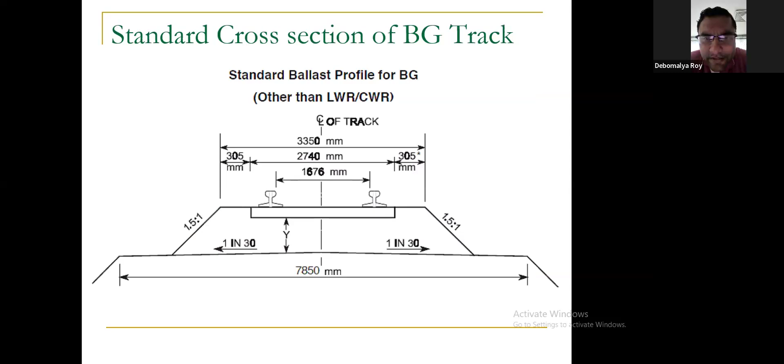In this slide, what is given is the dimension of Y, that is ballast cushion. Ballast cushion in general, we adopt 300 mm to 350 mm, or in some cases 400 mm. 250 mm is not adopted nowadays; those were adopted in earlier times. But in some yard portions or old stations where modification has not yet been done, there may be 250 mm ballast cushion available. Generally, we adopt 300 mm and 350 mm ballast cushion, that is Y is equal to 250 mm, 300 mm, or 350 mm.

In some important sections, such as the DFCC, that is dedicated freight corridor, where heavy traffic movements are considered, there are some stretches where 400 mm ballast cushion has been considered. Otherwise, 300 to 350 mm ballast cushion is generally found.

According to this ballast cushion, the approximate cross-section area of ballast is determined in square meters. These are actually required for reconciliation purpose and billing purpose. Here also, the main thing is for single track, the top of embankment width will be 7850 mm. This is standard.

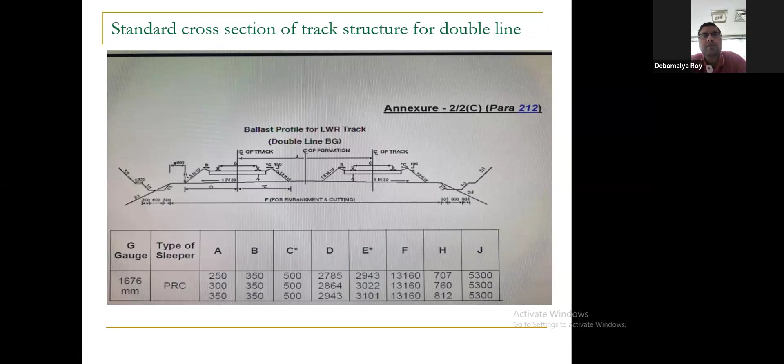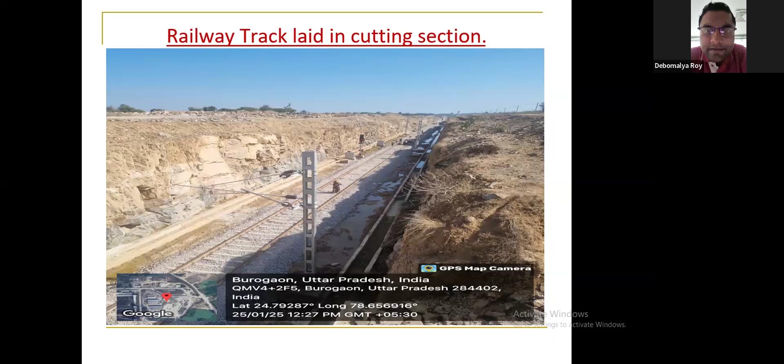Here I have shown the vertical cut portion at one side, and at the opposite side, you can see 1:1, that is 45-degree cutting. Because in the left side we encountered hard rock, we kept vertical cutting. We didn't increase our construction cost, because cutting, rather blasting, requires huge expenditure. So you can always avoid it by providing vertical cut wherever you encounter hard rock.

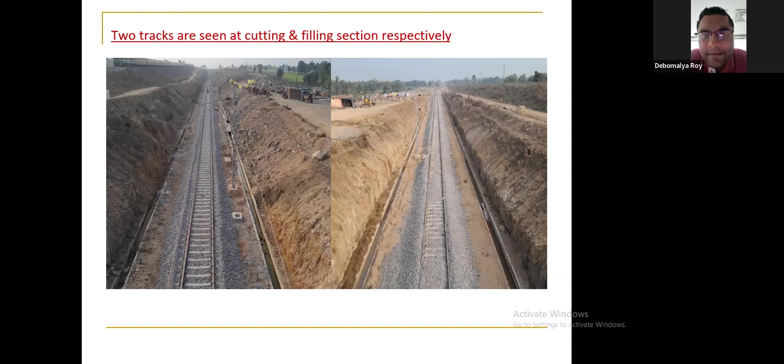Checking and adjustments are still pending. Also, you can see the fasteners of rail with sleeper. In the sleeper you have 4 inserts where these elastic rail clips insert, and one end of that elastic rail clip lies on the flange of the rail. By that, the rails are fixed. So at every chainage or kilometerage on the sleeper, 4 such fasteners are maintained, 4 ERCs are provided. This is the mechanism of rail connection with sleeper.

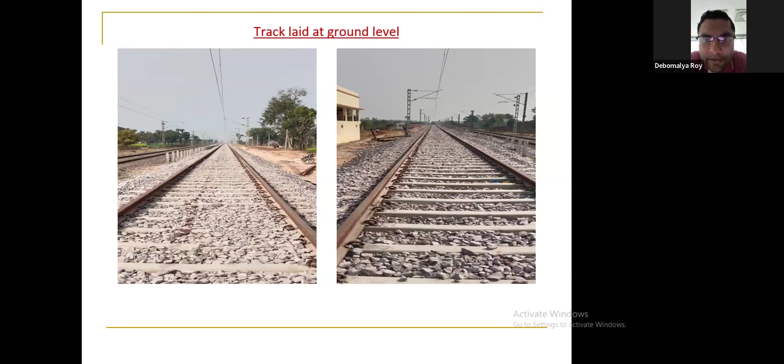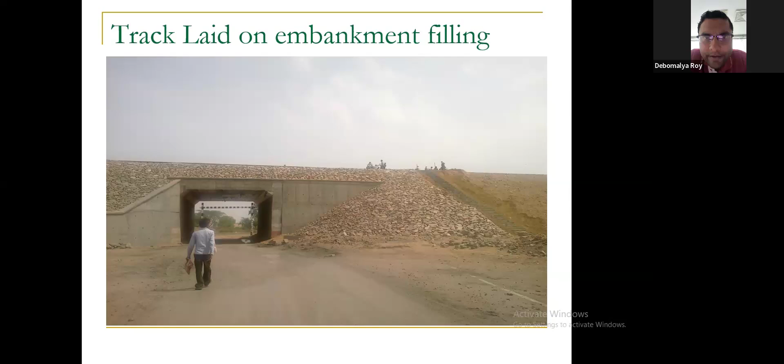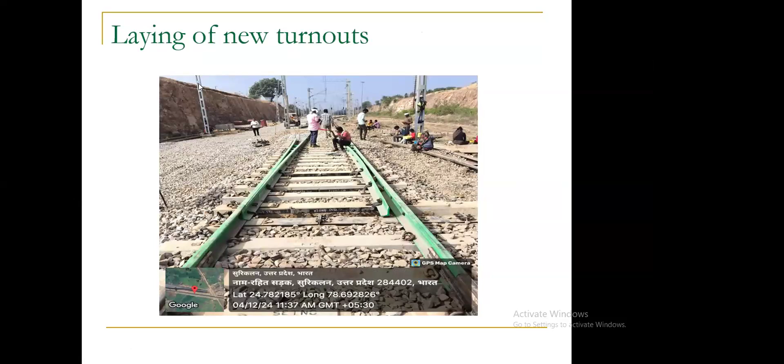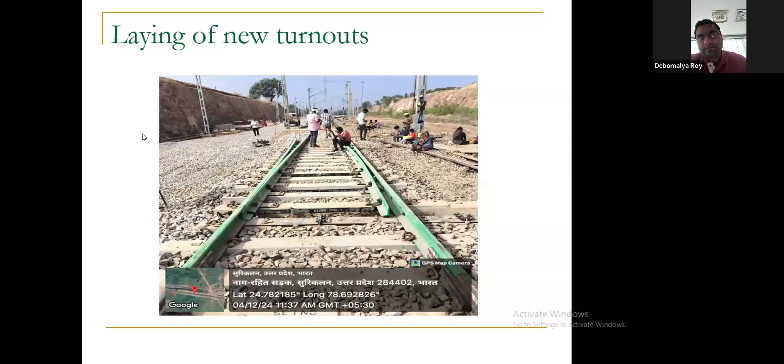For any new railway project, you have two phases of work. One is entirely new work, which is independent and can be executed independently. The other is connecting that new track with an existing station or yard, because otherwise no train will come. You cannot create an independent railway siding without jointing it with an existing railway station or yard.

Whenever you connect with an existing station or Indian Railway yard, you have to go through NI working. NI working means non-interlocking time, where all other trains are operated manually, not through signals or point machines. In those phases, you have to complete the connectivity work.

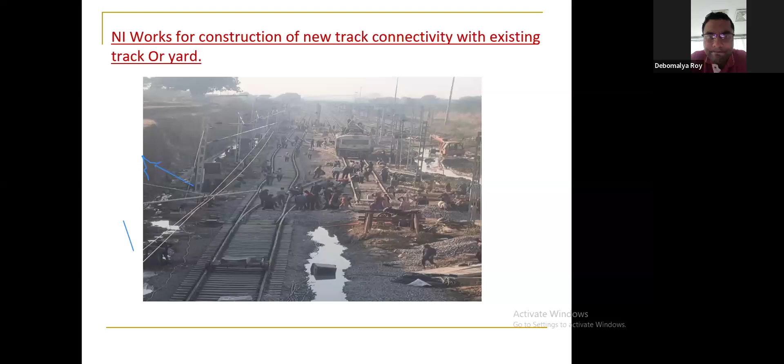Here I have only shown the NI working where a huge number of manpower are engaged.

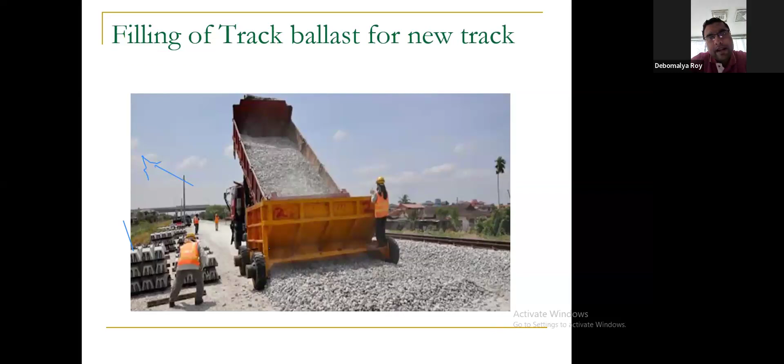Filling of track ballast. Track ballast is a very important part of track structure as far as civil and railway engineering is concerned, because this ballast transmits the load of the train. The load is transmitted to the sleeper first through the rail, then the sleeper distributes and transmits the load further to the ballast section, and then the ballast dissipates it further to the prepared subgrade. So the ballast section's sufficiency, adequacy, and quality are very important.

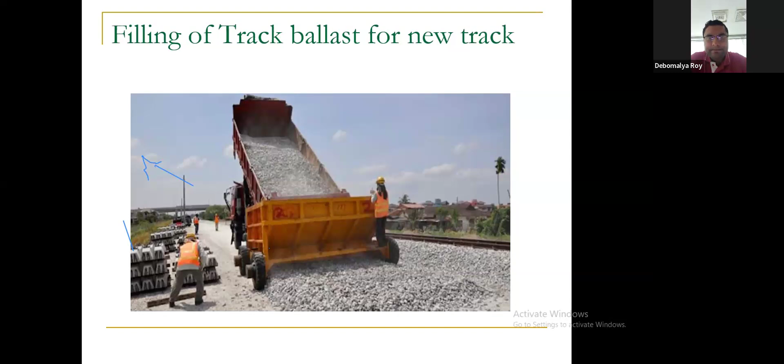Narrow gauge and meter gauge are obsolete, so we only have broad gauge sections. Aggregate abrasion value maximum allowed is 30%, and aggregate impact value maximum is 20%.

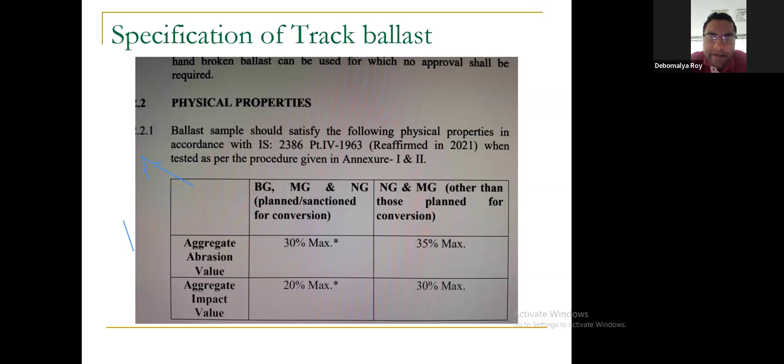Water absorption is generally 1% and maximum allowable up to 2.5%. Water absorption also plays an important role, but for ballast checking and quality, aggregate impact value and gradation are the main things. Gradation is very important; ballast size is the main factor.

Ballast size is between 65 mm and 20 mm. Below 20 mm, only 2% is allowed. If the percentage of ballast finer than 20 mm goes beyond 2%, there will be a rate cut on the agreed rate, that is the rate agreed in the purchase order. There will definitely be a rate cut if material finer than 20 mm is found more than 2%.

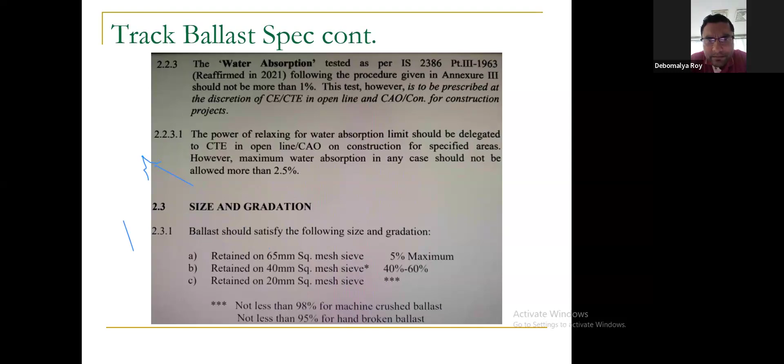First, we have to procure 100 cubic meters of ballast and stack it properly in a trapezoidal section. We can all see those stacked ballast whenever we pass by trains.

First, we construct a trapezoidal section using 100 cubic meters of track ballast. Then from that ballast, we carry out all the tests: aggregate impact value, Los Angeles abrasion, moisture content, and sieve analysis. If the tests are okay, meaning the ballast is found suitable for use, further ballast will be procured.

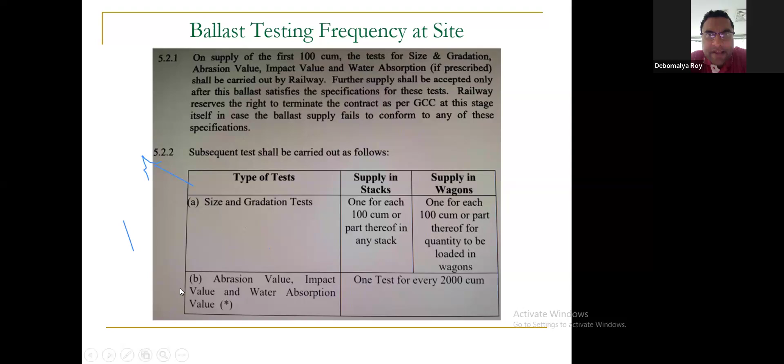Initially, you have to stack the first 100 cubic meters, then carry out tests, and then further tests: gradation per 100 cubic meters, and aggregate abrasion value and Los Angeles aggregate impact value per 2000 cubic meters. These are the standard ballast quality checking policies that everybody has to adopt.

Okay, a case study, that is overview of LPGCL railway yard and track parameters. Here I have taken our yard, but through these track parameters, I will also explain the general deviations and general features. So this is not only applicable for our LPGCL yard, but these are also applicable for Indian Railway tracks in different manner. Parameters will vary. Okay, I will explain.

Okay, that is a different thing. So there will be a specified track kilometer. So India is having some particular overall track length. Broad gauge track, we all know, meter gauge and narrow gauge are obsolete nowadays. So the gauge is 1676 mm, that is in between two gauge faces. That means the inner faces, the clear distance of inner faces of rail is 1676 mm.

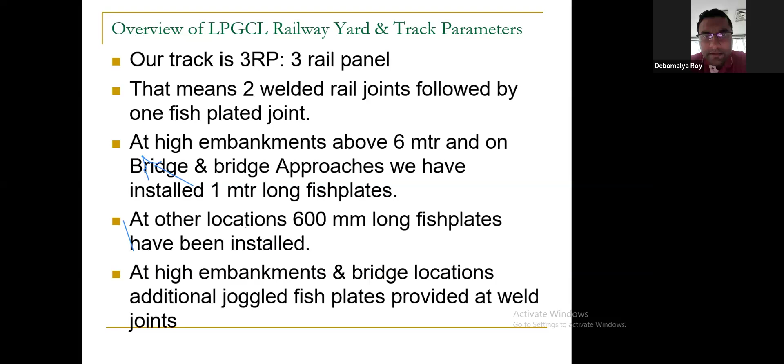And as I mentioned, at high embankment, bridge locations and bridge approaches, you have to secure your weld joints additionally with joggled fish plates. Those things I will show in my next slides, where you can see what a joggle fish plate is and everything.

This is permissible speed. In every section you will have permissible speeds. For Indian Railway, what is the permissible speed? Many people will say 240, 180, 200 - no, those are not permissible speeds, those are speeds of the locomotive. In certain cases a 180 kmph trial has been executed, but up to today, the maximum allowable speed in Indian Railway is 160 kmph, and that too in a very small stretch from Agra Cantonment to New Delhi.

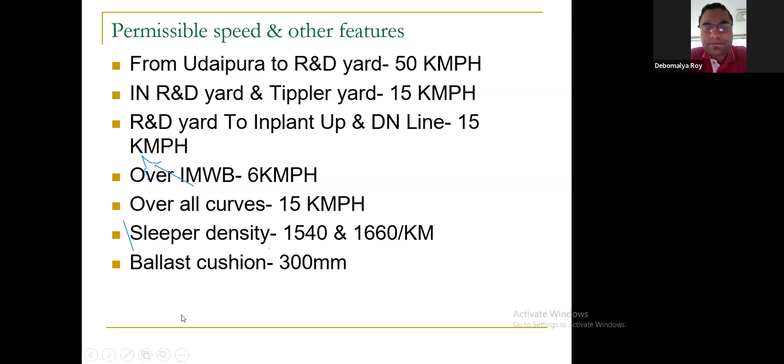Emergency track repair. This is very important because whenever some failure in track, signaling, or OHE occurs, it becomes emergent, since trains are continuously running 24 hours a day. So whenever there is a major failure, the train will not be allowed to move and will stop. Once the train is stopped, it becomes an emergency. So any major failure in track is an emergency failure which needs to be attended to at the earliest.

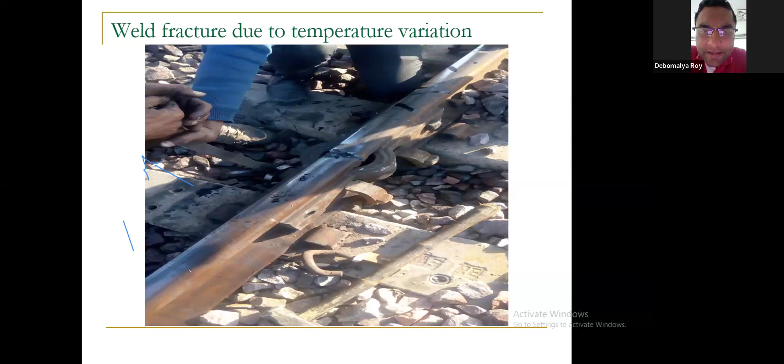So if one nut bolt is fractured or sheared, trains are allowed to move at their original speed; sectional speed is not reduced. But whenever it is seen, it must be restored at the earliest - we have to replace it with a new nut bolt.

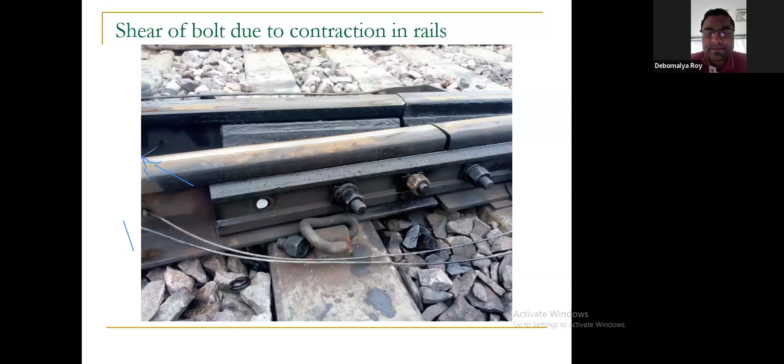Okay, next slide. Maintenance of track and track structures. Next slide.

This is IRPWM. In the start, I already said that whatever work we do in railway, whether construction or maintenance, is done as per approved RDSO documents. This is also another RDSO approved document - the Permanent Way Manual. Any type of maintenance activity has to be carried out based on these literatures. This is a very useful document for all railway maintenance engineers, who must follow these documents while carrying out any maintenance activity.

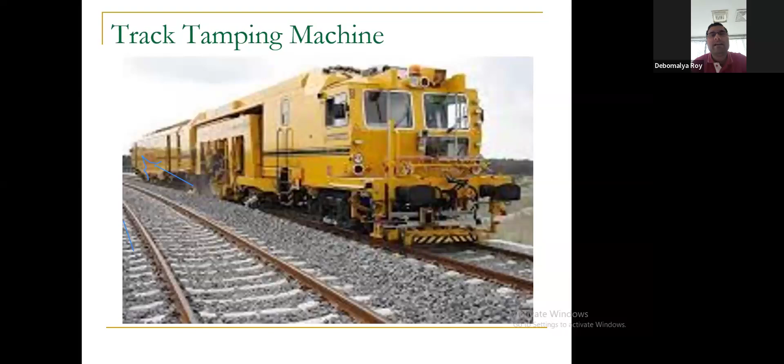Indian Railway has this sort of machine, but for private sidings, track maintenance is generally carried out manually. I will explain that in later slides. Okay, next slide.

Responsibility of engineering officials. These are a bit theoretical part. I'm just reading these things, nothing to explain in detail.

Devote careful and continuous attention towards the efficient upkeep of track to achieve good and smooth running quality. Running quality should be reviewed by riding on locomotive or rear vehicle of fast trains.

This is the mechanism followed by Indian Railway. In the last coach, a moving track recording system is installed, and senior officials can check the track. Automatic data on gauge, cross level, longitudinal level, any gauge difference or level difference will be automatically recorded in that coach. So these are the techniques used to gather site records and to assess where exactly we have to execute track maintenance activity.

Condition of track is best judged by the track recording car, in rear wheel track recorder. Oscillograph, these are installed inside the car. On-foot inspection and trolley inspection are also carried out. Trolley inspection is very crucial also. We maintain record of inspection and ensure compliance of inspection.

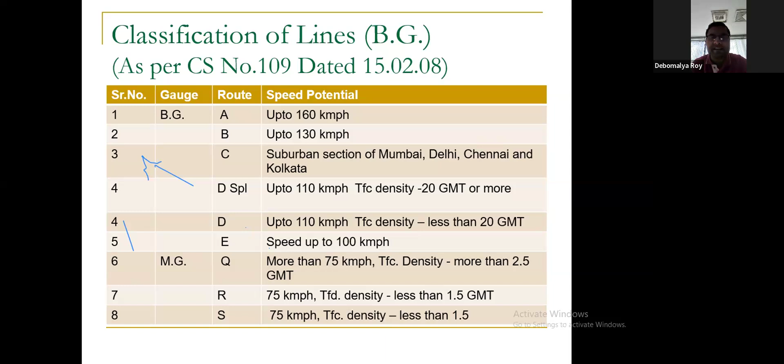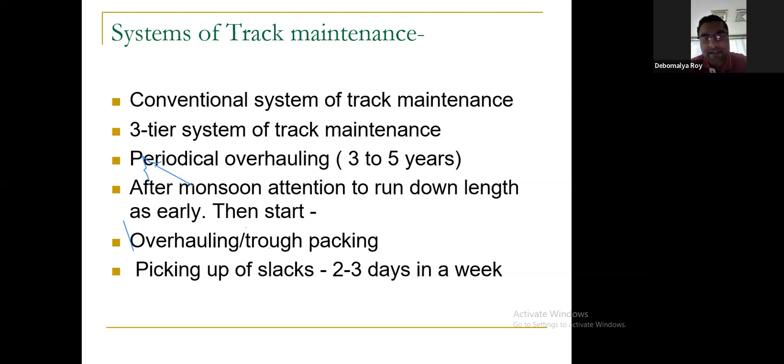Okay, next slide. I think I am having less time.

On track machines -- excuse me, Debomalya, sorry to interrupt you. You have enough time, you can continue please. No issue, if you need 15 or 20 minutes more, okay. If I need, I will carry out for 10 to 15 minutes more. Yes, yes, definitely, okay. Thank you.

Deep screening is replacement of track ballast, complete replacement of track ballast with new one, and at the same time that replaced ballast will be kept at a nearby location, made free from dust and stone dust which are having lesser than 20 mm size. Those parts will be eliminated and the rest of the ballast will be used again. So this is called screening, periodic screening, deep screening of ballast.

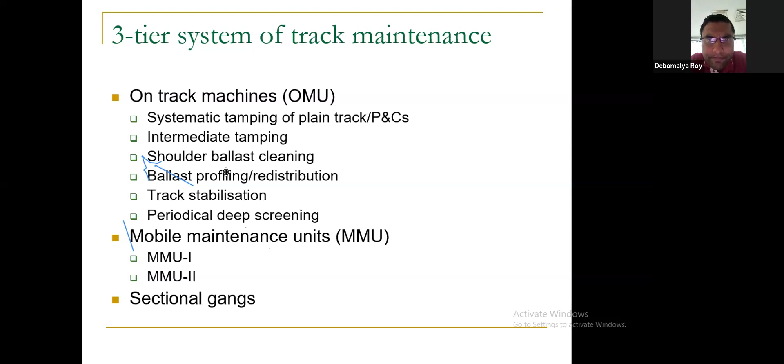Rail cum road vehicle. These are some techniques adopted by Indian Railway. Indian Railway has a huge and different process of track maintenance and its evaluation, where I have to actually use the gangs to evaluate the exact requirement. These are the methods Indian Railway monitors.

Creep and gap adjustment, de-stressing of LWR, CWR, these are also required periodically. De-stressing means in case of LWR section or CWR continuous welded rail section, you have to take 1 kilometer of track stretch and open all the track fittings. Then the track will be made free, and it will adjust its length according to existing temperature.

This is called de-stressing of track. If this de-stressing work activity is not carried out at a particular interval or periodically, then there may be deformation of track observed. Deformation of track means bending in the track. So from time to time, de-stressing of long welded tracks and continuous welded tracks is also important.

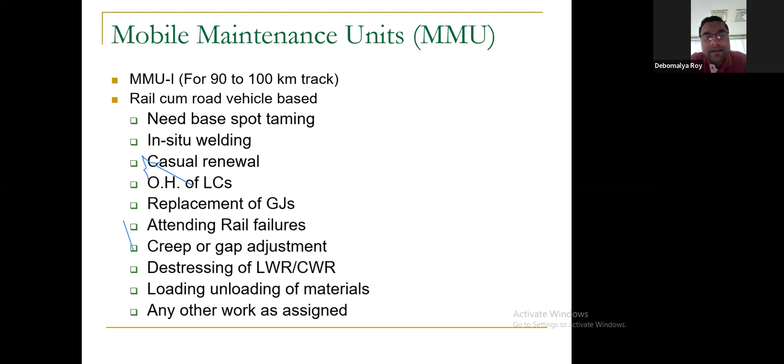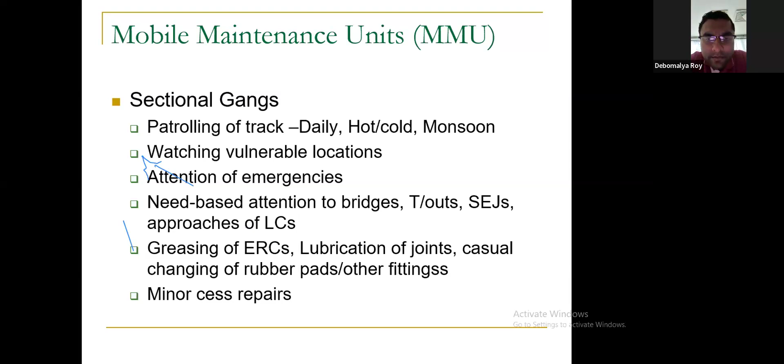Attention to loop lines, creep and gap adjustment. Gap adjustment is mainly done at fish plated sections. Nowadays, fish plated sections are not there, so this is applicable for yard lines only.

Pre and post tamping attention. Tamping means packing of sleeper and ballast. These are actually preventive maintenance type, preventive and regular maintenance. Okay, standard track fittings.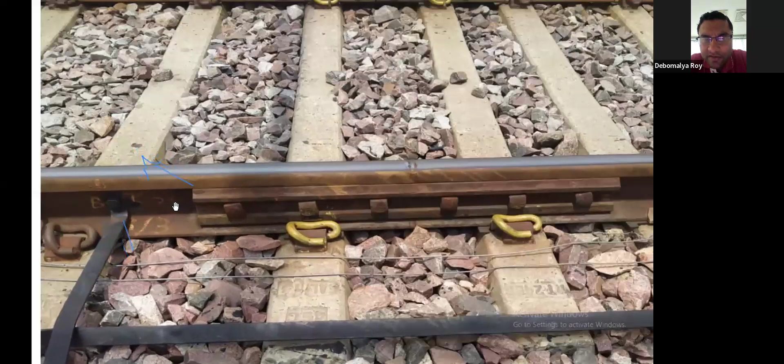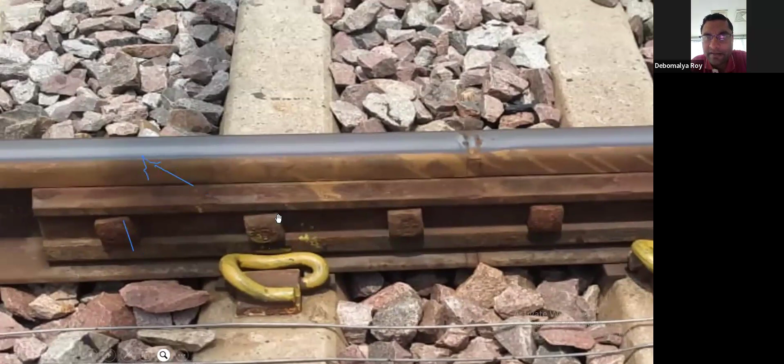Janarul, can you please zoom in if possible? Zoom in further a bit more. Okay, done. Show the next sleeper, at right hand side.

Now you can see below that yellow ERC, that rubber pad. Small rubber pad, that is called grooved rubber pad. You can have different thickness of rubber pad. In yard lines, only 6 mm thick rubber pad will do. In dedicated freight corridor, 10 mm or 12 mm thick rubber pads are used. In points and crossing zones, 8 mm rubber pads are used.

So these are standard cross section. Janarul, please zoom out, further zoom out, in normal photo. Here you can also appreciate...

Earthing bond that is used for OHE purpose, overhead electrification purpose. These OHE bonds have to be provided whenever you are giving fish plated joints. You have to provide OHE bonds, these are called C joints, C type bond. But in railway yard, railway track, you will not see this type of bond. You will only see L type of bond, that is bond connecting railway track and OHE mast.

You can also see one jumper wire, two jumper wires are there. These jumper wires are connected from one side of rail to another side. Those are used for signaling purpose, signaling connectivity.

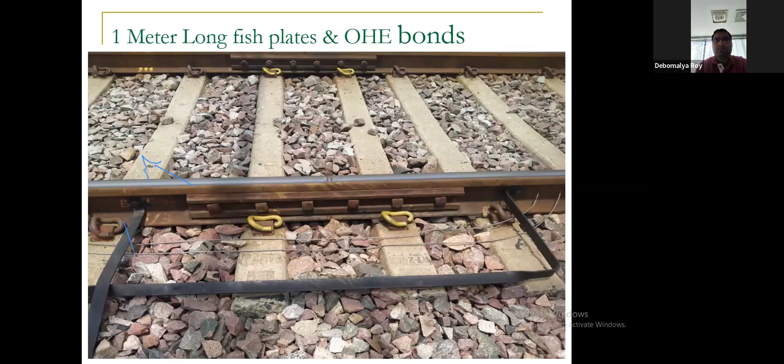Yes, this is a 1 meter long fish plate with 6 bolts. These, as I have already said, have become obsolete nowadays.

Yes, this is weld joint. What I was saying, this is railway, two rails have been jointed with AT weld, aluminothermite weld. I have slides over AT welds also, so I am not explaining in detail the welding procedure here.

You can also see in this pic a white colored liner. Janarul, please, the right side. No, right side. This is weld joint, right hand side.

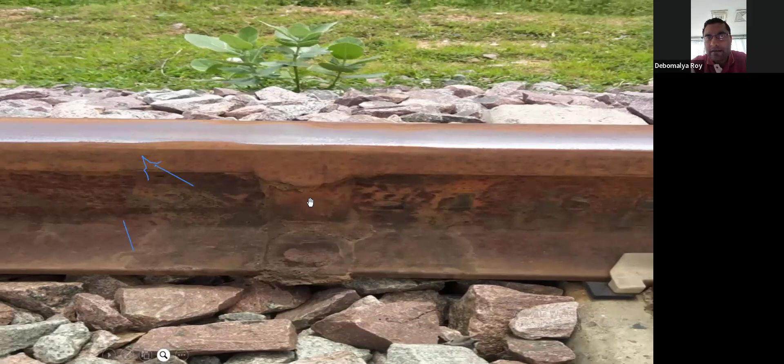Here you can see rubber pad, black colored rubber pad, and white colored GFN liner. This white colored thing is called GFN liner. This is used for signaling purpose to give a discontinuity of current. Actually, these two rails also act as cables, carrying electric current through these tracks due to signaling work. So in every sleeper, we have to give discontinuity, and these GFN liners are used. GFN liner means glass filled nylon liner. This is also a very important fitting.

In every sleeper, you have to provide 4 ERC, 4 GFN liners, and 2 grooved rubber pads. These are standard fittings for every sleeper, provided beneath the 2 rails. Okay, next slide.

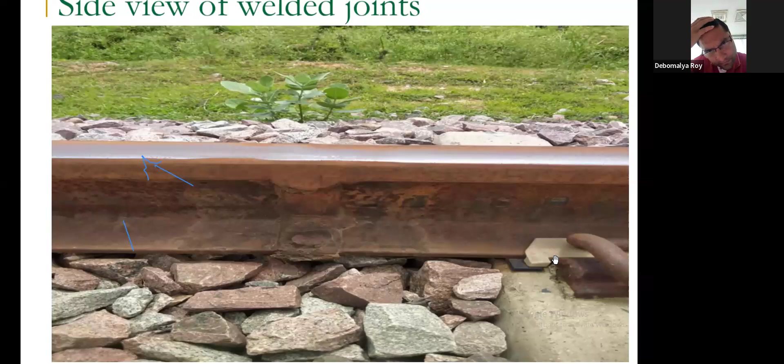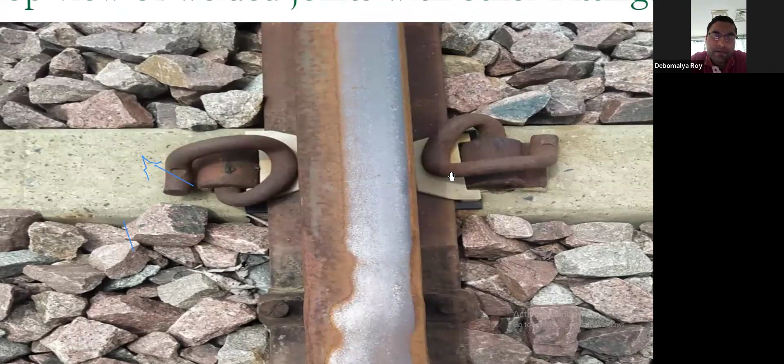Yes, welded joint from top view. ERC and GFN liners are visible. And this is a suspended joint. Actually, weld joints should be placed in between two sleepers. This is standard practice, so welded joints should be suspended joints and should not come on a sleeper. Otherwise, stress buildup will be there and weld fracture will be inevitable.

Gang diary, gang chart, these are required documents being maintained by the gang working team. Okay, next slide.

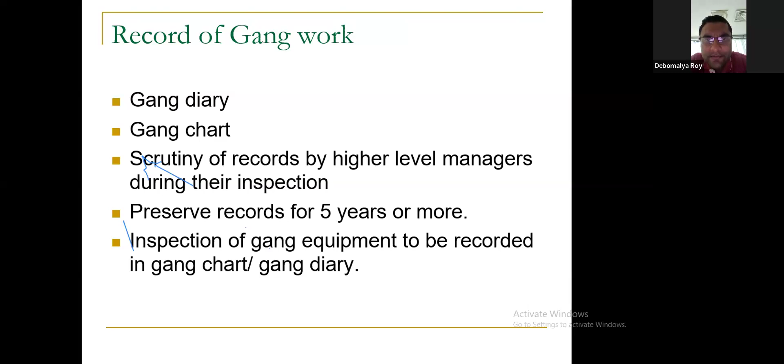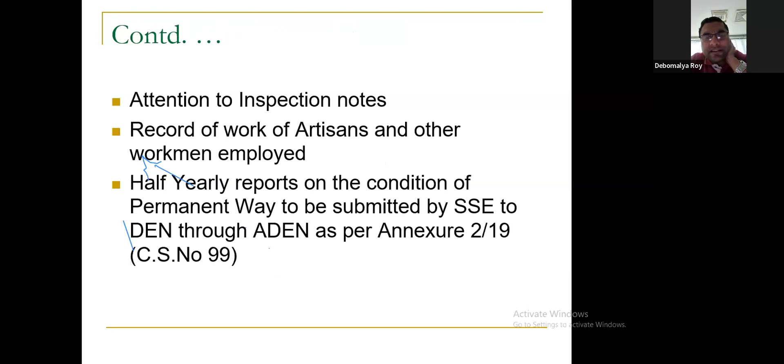These are actually section registers which are maintained as per para 210 of IRPWM. I have already explained these things. Next slide.

Miscellaneous points: availability of labor on section, details on encroachment. These are duties of the sectional PWI - any infringement, accidents attributed to P.Way, list of reference books. These are required to be mentioned, and these records are required to be kept for 5 years. This is standard practice. Okay, next slide.

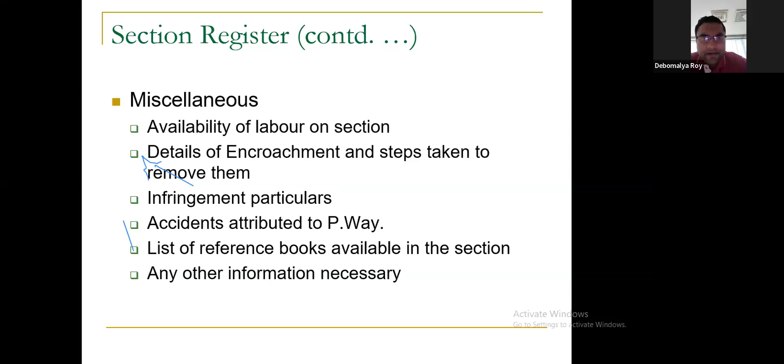Okay, these are some para numbers, that is the specification we have to refer. Next.

Provision of trolley refuge. Trolley refuge is actually for trolley inspection. Regular track inspection is being carried out by push trolley or motor trolley, and at the same time by engine or rear window inspection car. So for accommodating push trolley, we have to provide trolley refuge.

Trolley refuge means in a busy section, when trolley inspections are carried out and trains continuously move from one direction, trolleys have to be kept outside the track frequently so that the train can pass. So trolley refuges have to be constructed.

These are the intervals at which trolley refuges are to be constructed. Okay, maximum distance should not be more than 1 kilometer. This is standard practice. Inside a tunnel, every 100 meters in either way, you have to provide trolley refuge. On a high embankment, every 200 meters, you have to provide trolley refuges for placing the trolleys.

Even on bridges, in major bridges, you will find on each pier, one trolley refuge has to be considered, where the trolley man can place their trolley while the train moves through the track.

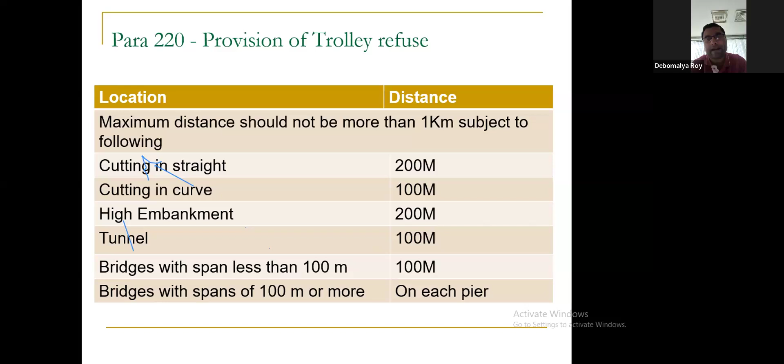Okay, next slide. Manual maintenance of track. Okay, next slide.

Through packing - I'm just going through this. This is the main activity of track maintenance under manual track maintenance, what we actually adopt in our railway yard, because we do not have machines like Indian Railway, and those are not also required. Through packing is done on a program basis after monsoon, from one end of the section to the other end, generally started in October. This is very important.

Time is taken based on seasons and temperature. So once the monsoon ends and prior to the start of winter, this through packing activity is taken up, started in our yard and in Indian Railway also. Next page, next slide.

Through packing consists of the following works done systematically in sequence: opening of road, examination of rail, sleeper fastening, squaring of sleepers wherever required, alignment of track. Alignment of track actually means correcting disalignment or misalignment, which occurs due to sleeper squaring being disturbed. So sleeper squaring and alignment of track is the same thing - whenever your sleeper is squared and aligned, the track will become aligned automatically. Okay, next slide.

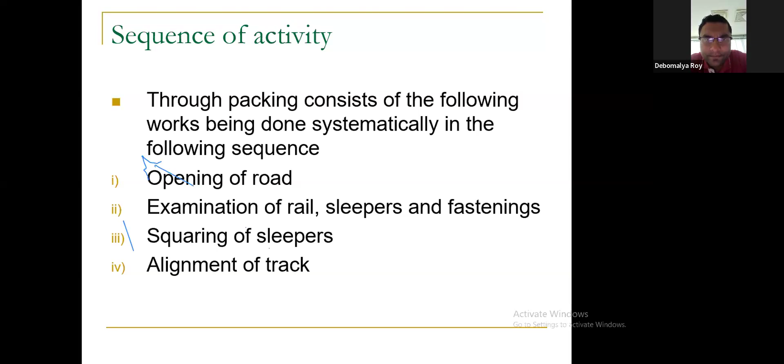Gauging means in the ERC and rail flange, there is some gap that is maintained, required due to other requirements - those will take more time to explain. So what happens is there remains some gap between ERC and rail flange, and sometimes the gauge may change - slack gauge may be there, or tight gauge may be there, meaning more than 1676 mm or less than 1676 mm. So gauge has to be corrected.

Packing of sleepers, repacking of joint sleepers - joint sleeper packing is very important. Joint sleeper is the sleeper where a fish plated joint or ACJ is provided, and also welded joints. Those are important, and packing is generally carried out on those sleepers.

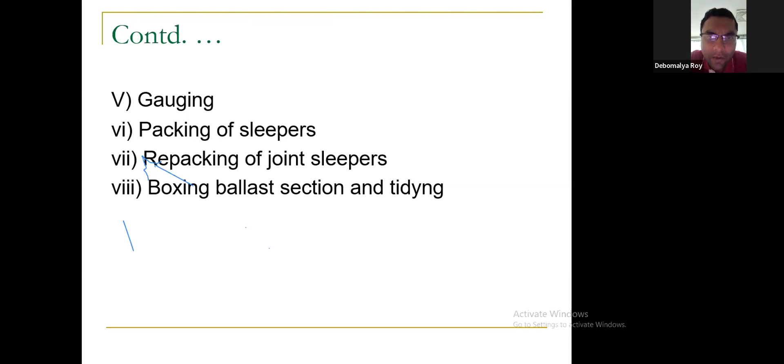Boxing, ballast section and tidying. Okay, next slide.

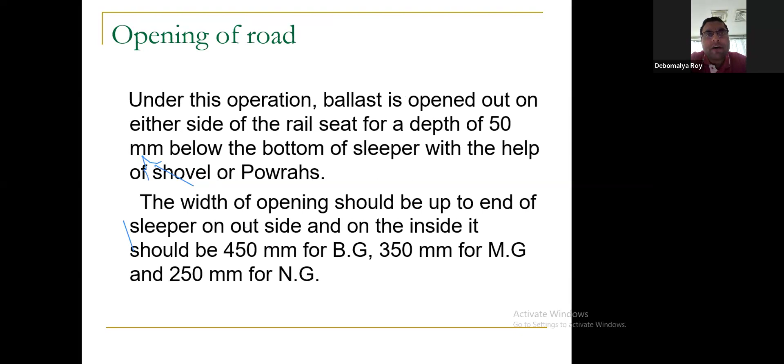Ballast section is made standard. Under this operation, ballast is opened out - that is the same thing. The ballast section, that is ballast profile, is maintained. Next slide.

Examination of rails, sleepers and fasteners - I have already said these are very important. These are noted and recorded by the patroller and communicated to higher officials, who will time to time replace and change the things.

Okay, next slide. Squaring of sleeper - I have already said this is very important. By squaring of sleepers, rail alignment will be corrected automatically.

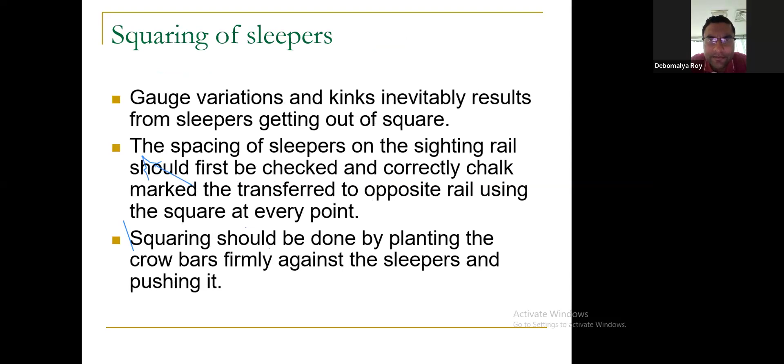Next slide. Alignment of track, same thing. The alignment of track is normally checked mainly by eye adjustment, or if you have a track maintenance machine, that machine does it automatically. But for manual maintenance, by eye adjustment you assess the alignment or misalignment of the track and correct it accordingly, taking 50 meters of stretch at a time.

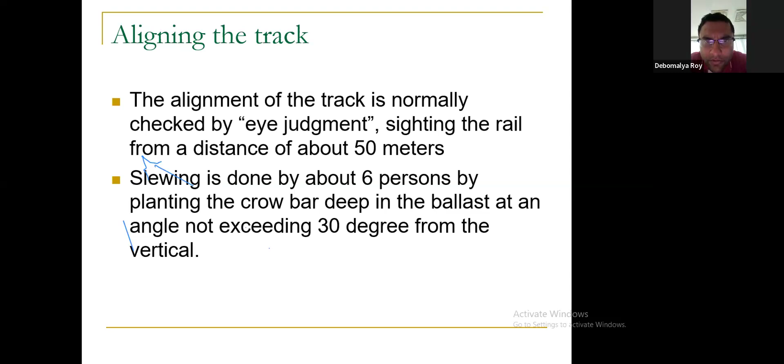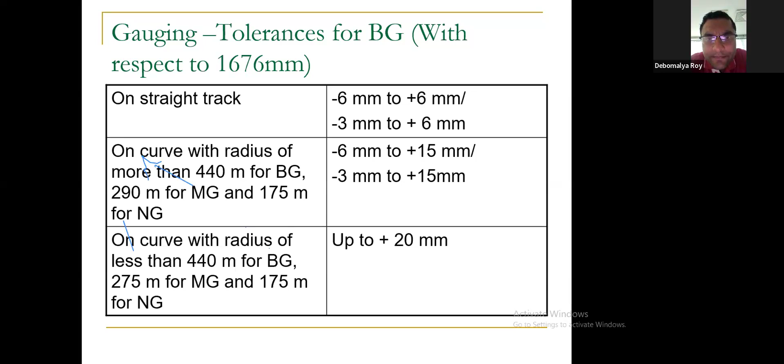Packing of sleepers I have already said. Next slide. I will go through the point and crossing portion, which I have already covered.

Systematic overhauling is done periodically, every 5 years, depending upon traffic movement. One calculation is done called GMT calculation, Gross Million Tonne load. If total GMT crosses 20, you have to do complete overhauling of the track. There are different specifications for different types of overhauling. What I told you is for complete track overhauling. For sleeper overhauling, that is changing of sleepers, you can do it by visual inspection. If you find cracks or problems, you can change the sleeper.

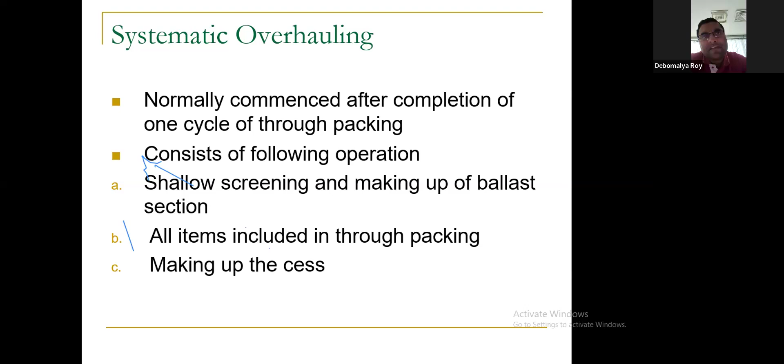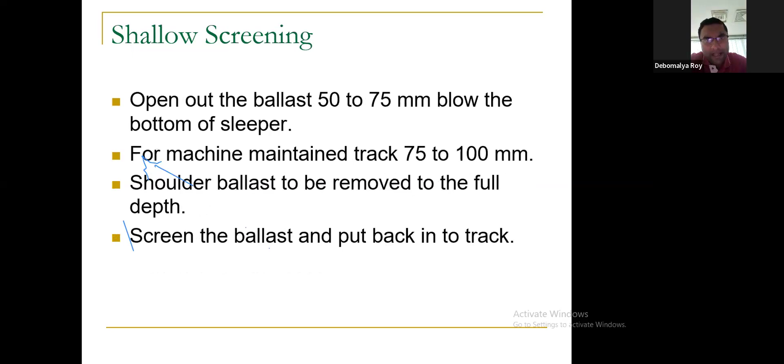Shallow screening and deep screening, I have already said. This is done for ballast, replacing and reusing some old ballast along with new ballast. This is the technique of reusing some portion of old ballast, and the balance you add new ballast. This is the technique of shallow and deep screening.

Point and crossover, I will explain a bit. I will take some 5 to 10 minutes.

Types of turnout, I have already said, 1 in 8.5 and 1 in 12. These are the most preferred turnouts. In normal track, Indian Railway uses 1 in 12 turnout, and in yard or station yard, you can have 1 in 8.5 turnout. Crossover length means consisting of 2 turnouts. Total crossover length comes out to be 75 meters for 1 in 8.5.

1 in 8.5 means 1 meter horizontal displacement for every 8.5 meter longitudinal distance. 1 in 12 means 1 meter horizontal displacement for every 12 meter longitudinal distance. So it is obvious that in case of 1 in 8.5, the speed limit will be less, and in case of 1 in 12, the speed limit will be higher. While a train crosses a facing point of 1 in 8.5, the permissible speed is 15 kmph, and for 1 in 12, the permissible speed is 35 to 40 kmph, 30 kmph you can definitely have.

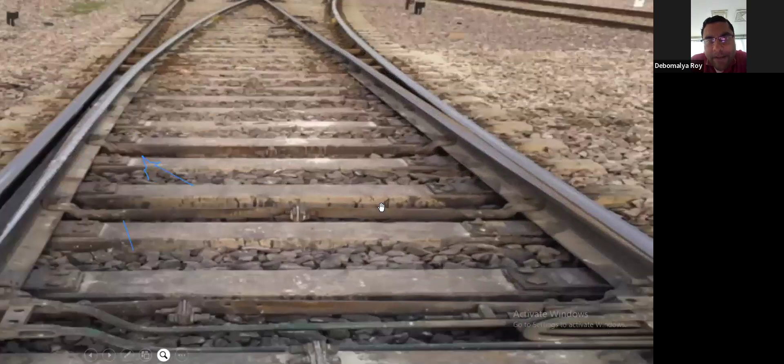One thing I have not mentioned - for 1 in 8.5 turnout, there will be a total of 66 special sleepers or turnout sleepers. Those won't be normal sleepers; those sleepers will have much more length than 2.75 meters. The maximum length of a turnout sleeper will be 4.65 meters. So for 1 in 8.5 turnout, there will be 66 special sleepers.

In case of 1 in 12 turnout, there will be 96 special sleepers. Among 96, 5 will be approach sleepers, 83 will be main turnout sleepers, and 8 will be exit sleepers. So 8 exit sleepers, 5 approach sleepers, and 83 main sleepers. In case of 1 in 8.5 turnout, total sleepers will be 66: 5 approach sleepers, 53 main sleepers, and 4 plus 4, 8 exit sleepers. Next slide.

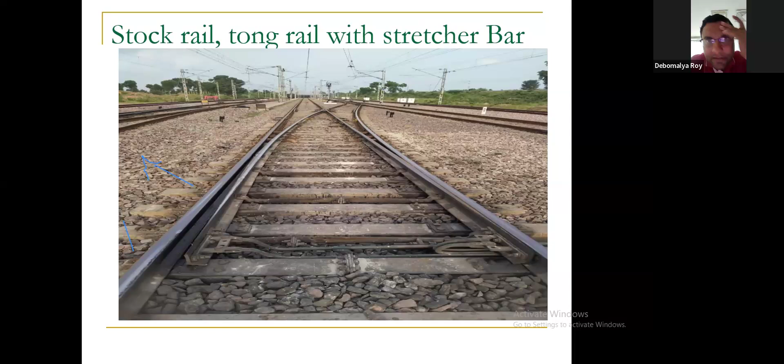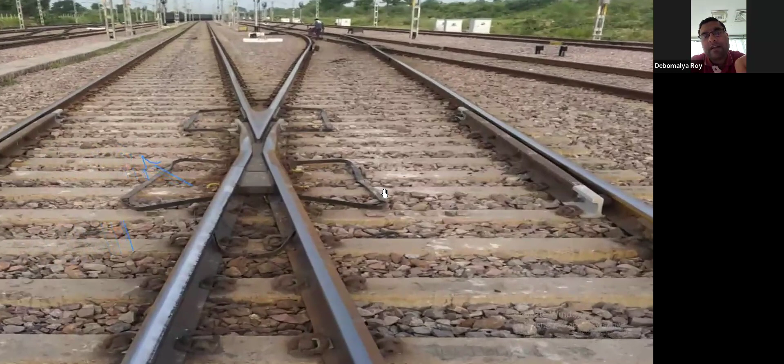Here you can see the crossing body. In the previous picture, the switch was shown, that is the tongue rail stock rail connectivity, and this is a crossing portion, the crossing body with check rail, additional check rail. So here actually the wheel crosses one rail. Here you will see at some portion, around 1 foot long, that is approximately 300 mm long, where there is no rail connectivity.

Okay, this is a hollow portion, the triangle - this is called the check rail area. So to counter this hollow portion, check rails are provided at both sides. Check rails are additional rails, 4 meter long, provided at both ends of the main track. These are check rails, yes, these are check rails.

This is provided because at this wing rail, at the CMS body center, there is a discontinuity of the tracks. At the center, you can see the discontinuity of the track where the wheel will hang. So the other wheel of the axle needs to be supported, and this support is done by the check rail.

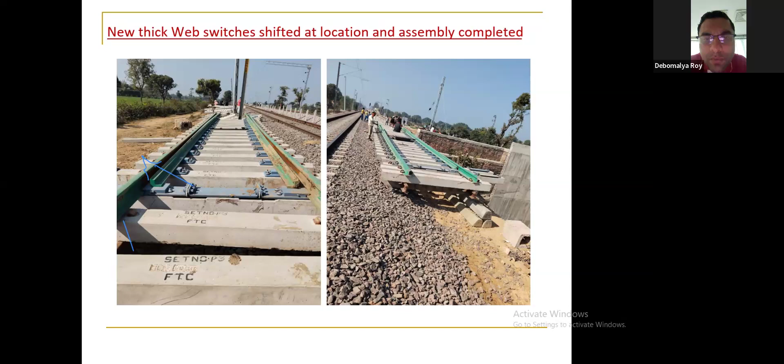Okay, next slide. Yes, this is a thick web switch, which is the improved version of the 1 in 12 turnout, where the tongue rail is very thick. Janarul, if you can zoom in, I will show the tongue rail is much thicker than a normal tongue rail. Yes, zoom in here, zoom in further.

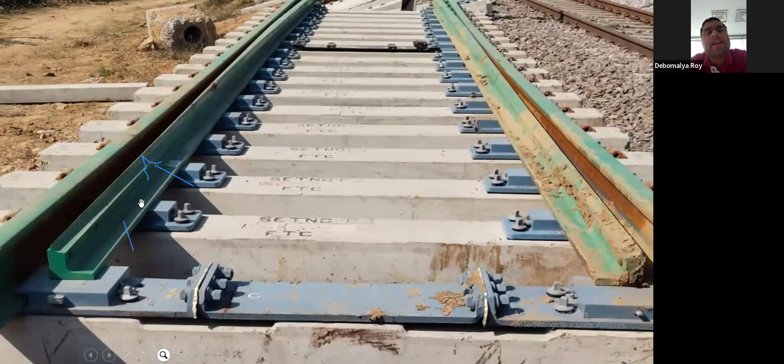Now you see the thickness of the tongue rail. Yes, now just see the thickness of the tongue rail. This is called the thick web switch, the improved version of the 1 in 12 turnout. And in most cases, Indian Railway is installing this 1 in 12 turnout with thick web switch nowadays.

And you see on that 13th sleeper, the chair plate is installed there. Yes, exactly - at this 13th sleeper, SSD will be connected, the spring setting device will be connected. Because you can see here, no stretcher bar is there; only through the spring setting device will the 2 tongue rails be connected.

And here at the tip of the tongue rail, that opening is also much more - here you have a 160 mm opening, whereas in a normal tongue rail you have a 115 mm opening. Okay, next slide.

I am taking much more time than what I was allowed, what I was allocated. Please, okay, I will take a further 10 minutes, not more than that.

This is a thick web switch with SSD. Okay, I have already explained this. Go through next slide.

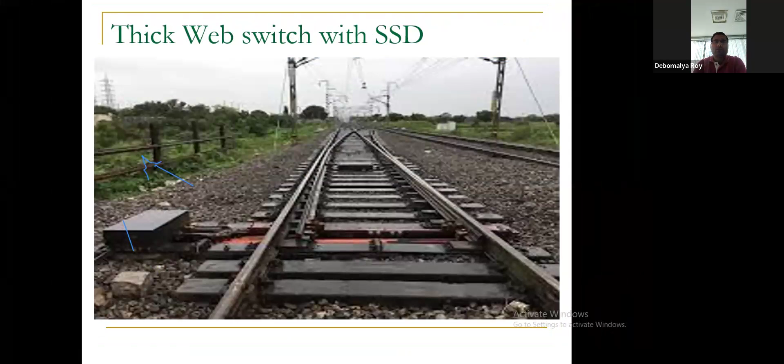These are to be installed 39 meters on either side of any turnout - this is as per specification. We have to install the SEJ at 39 meters on either side of a point or turnout where there is a continuous welded rail section. Okay, next slide.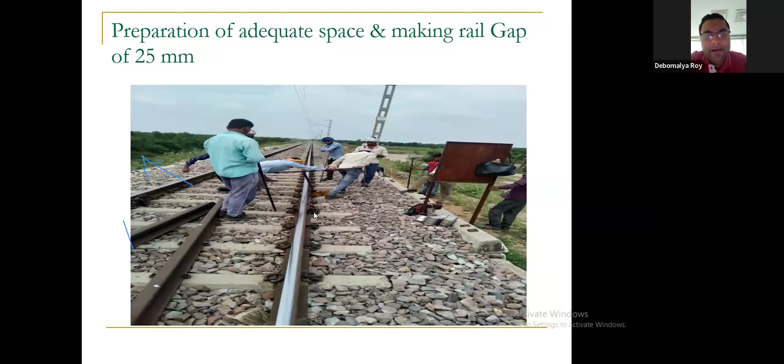This is the AT welding process. Before welding, that is jointing of rail, you have to make a gap of 25 mm where the newly prepared rail will be inserted. This is only the preparation of the gap.

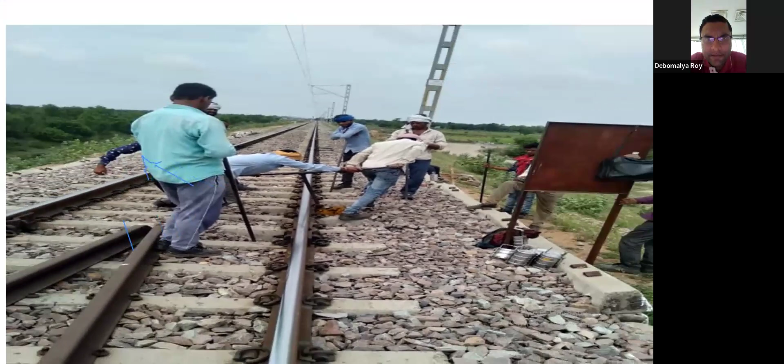Here you can see luting has been done. Luting means a shuttering or type of formwork, and heating is being done before pouring of the mold, before pouring of the AT material. This is heating after luting.

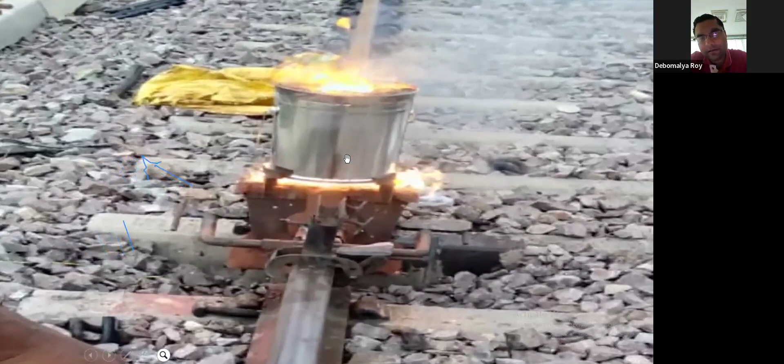This is heating, and after that iron is being manufactured here. Molten iron is falling inside the gap between the two rails. This is the final step of the welding process.

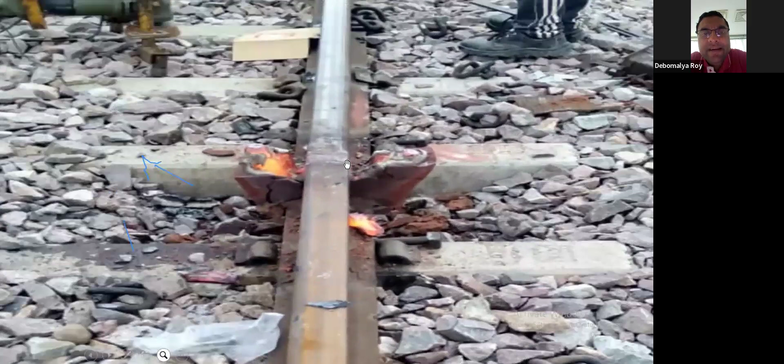This is after completion of welding, trimming has been done. Trimming means the excess material has been trimmed away.

This is after grinding and finishing. This is how it looks after the welding joint is completed. So this is one joint.

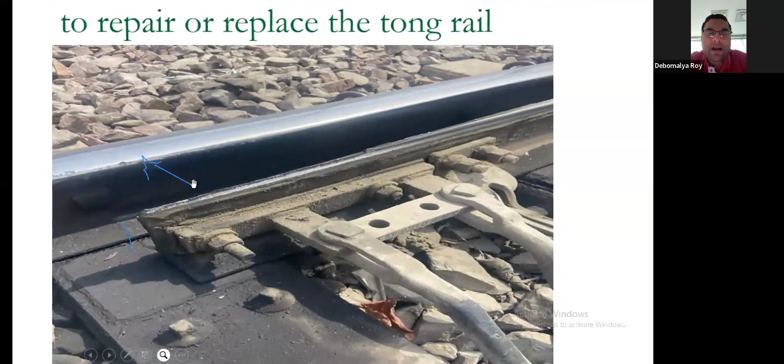Now, reconditioning. This is done at the tip of the tongue rail where tongue rails are worn out. After wear, the total length of wear will be 200 mm and the depth of wear must be 10 mm. Then you have to repair this tongue rail, the tip of the tongue rail.

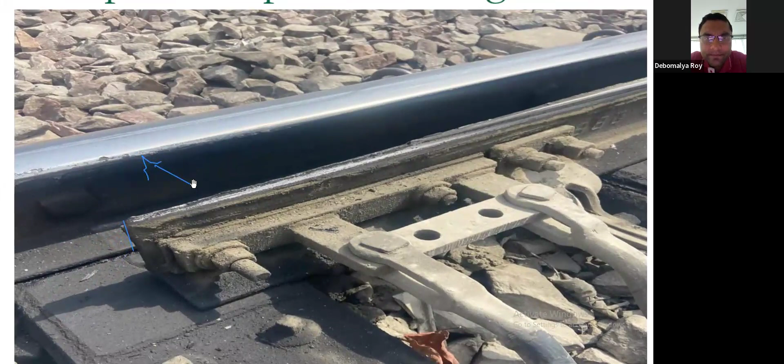Then after completing the reconditioning, it is painted with epoxy paint, which will be stored if this tongue rail is not being used right now. So it will be stored after being epoxy painted.

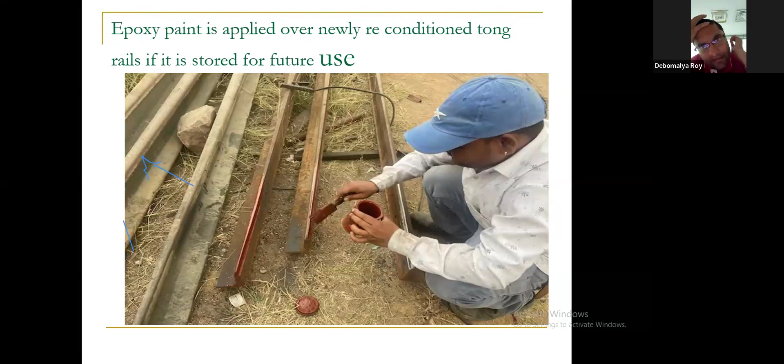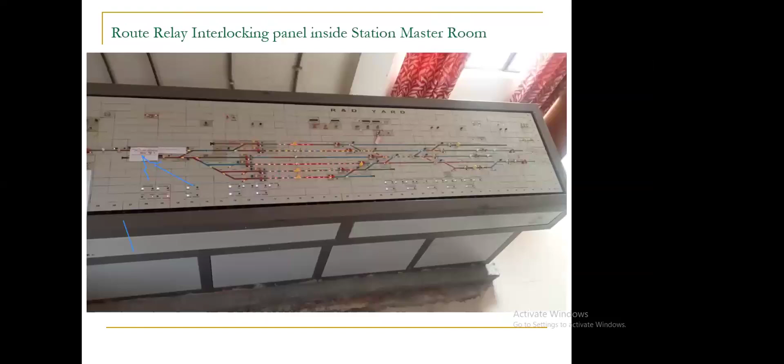This is the panel installed inside the station building. Through this panel only, the station master operates the points and crossings and the signaling system.

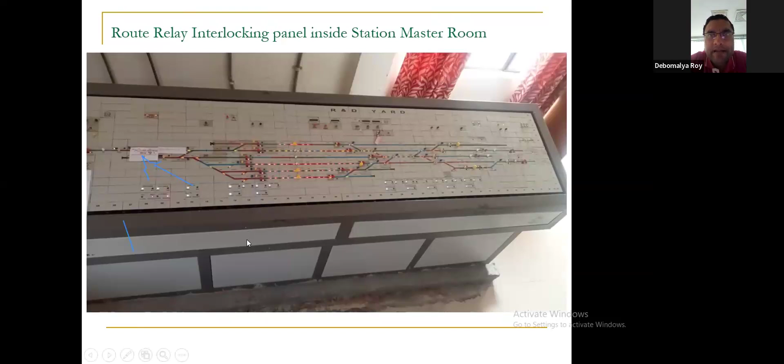Excuse me, Debomalya. Actually, the next speaker is calling me. Okay, so let's terminate this presentation. I think I have already presented whatever I had to say, so we can conclude the presentation right now.

Yes, I can see you are actually wonderful, excellent and outstanding. You have magically connected your real life field experiences to our academic theory and concept through your fabulous and fantastic, huge technical railway experience. Debomalya, you are lovely to showcase your railway intelligence and brilliance. And Debomalya, you look like Dada, that Sourav Ganguly, when you are speaking and looking at the screen. Your voice is like Dada's, so it looks like you are leading the railway experience in India.

So I'm sorry to interrupt and stop you. No, it's okay. Actually, I took much more time explaining some parts. Not an issue, the major part is already over. Yes, I can see that.

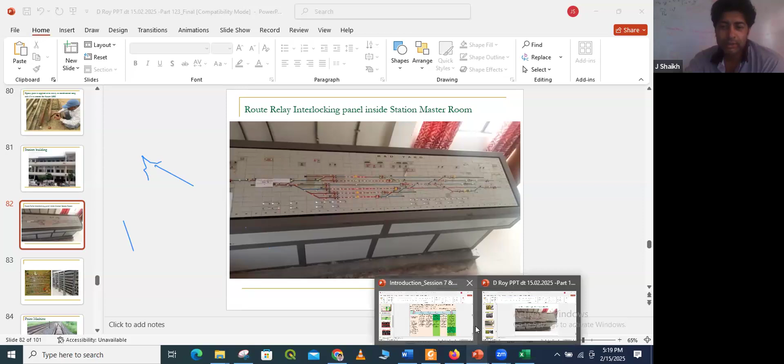Okay, Janarul, I am leaving because I have some issues. Okay, thanks, we'll talk, thank you. Krishna, yes. Shivsankar Kumar, please sir, are you there?

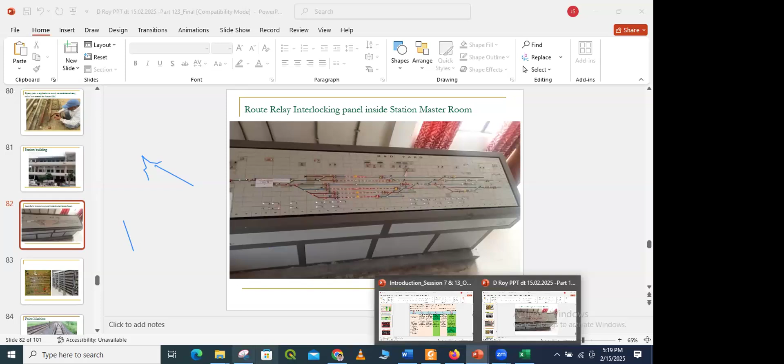Let me check, yes sir, he's there. Is video on? Yes sir, we are video on, you are totally visible. Quite good, I'm totally visible. That's good, so my voice is audible there? Yes sir. Oh, that's great. Actually, I am the last presenter, I think, right?